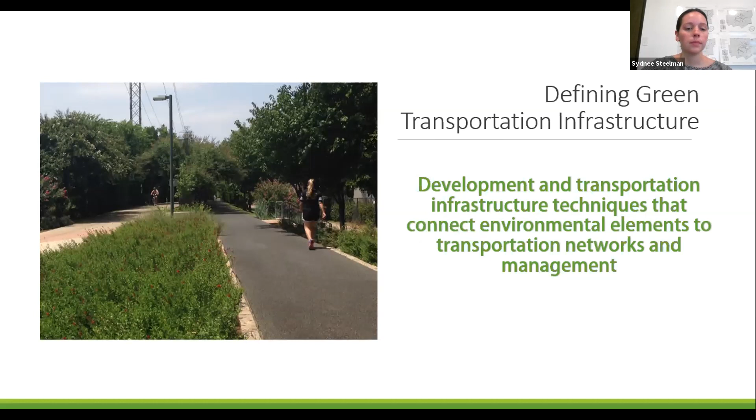The need for green infrastructure: it helps alleviate development impacts, which can also often lead to a depletion of natural resources. Some benefits include the reduction of project costs and waste, while also improving air quality, pedestrian safety, public health, and many more. Next slide, please.

So feeding into all of that, we have our NCTCOG Green Infrastructure Resource Guide, which provides a detailed overview for assessing the various choices you as engineers, planners, consultants may have when integrating green infrastructure into transportation projects. This guidebook covers the various types of green infrastructure, as you saw on the previous slide, as well as a few other aspects to green infrastructure. Next slide, please.

It features some example case studies, which I will highlight three interesting ones here. First, we have the Red Oak Creek Trail in Cedar Hill, which included the use of native plants and over a quarter mile of granite trails with decomposed granite accents in amenity areas.

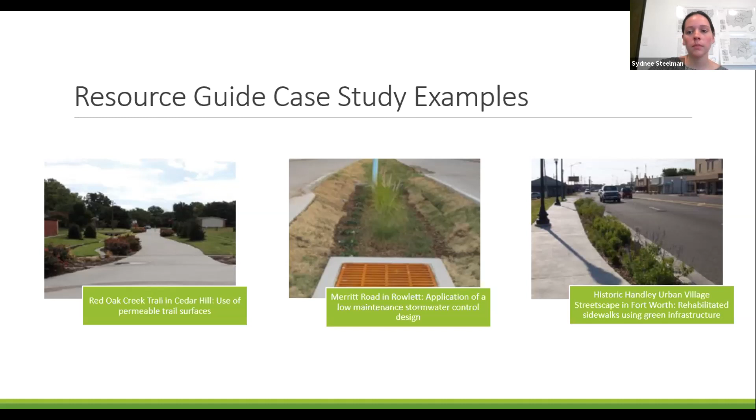Another important aspect discussed in the guidebook is the various financial aspects of green infrastructure, such as overall cost and benefit analysis, as well as the possible benefits of implementing green infrastructure. This section provides an overview of how green infrastructure can potentially reduce the cost of land acquisition, operations and maintenance, infrastructure replacement, and various other project aspects. It also features cost-benefit analysis tables for each type of green infrastructure you can implement, and breaks down various project aspects under those types.

Again, I would encourage you all to please check out this green resource guidebook. I can put a link in the chat box for your convenience, but it's also available on our website. That's all I have for you today, and I'm looking forward to the interesting presentations we have lined up for you all. Thank you.

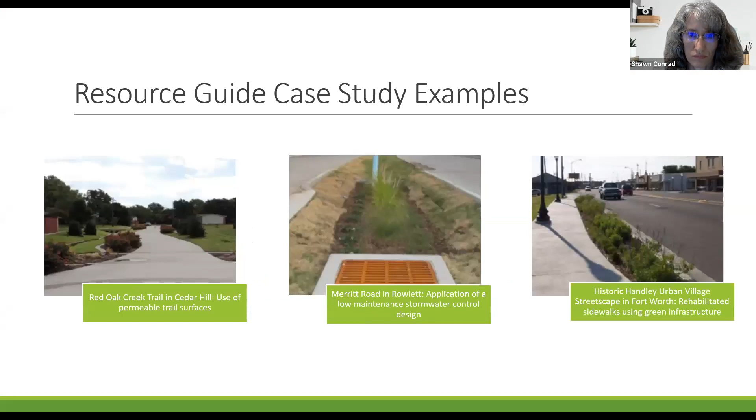All right, we are going to continue on to our overview of green infrastructure resources. We're going to start out with a presentation by Kate Filke, who is a principal transportation planner for the North Central Texas Council of Governments. She leads the environmental stewardship program for the transportation department at NCTCOG, where she oversees initiatives to mitigate development impact. So Kate, go ahead and take it away.

Thank you, Shawn, for the introduction, and thank you for the opportunity to present about a tool that NCTCOG's Transportation Department and Environment and Development Department collaborated on to provide to everybody. So if we could go to the next slide, please.

A few years ago, a member of the Transportation Department's policy board posed the following question. He said, we look at environmental programs as the right thing to do, but we look at them as a cost. How do we measure the return on investment of this work? So with only those two sentences as guidance, our staff launched efforts to create what became the Economic and Environmental Benefits of Stewardship tool. That's an awfully long name, so we just refer to our tool affectionately as EEBS.

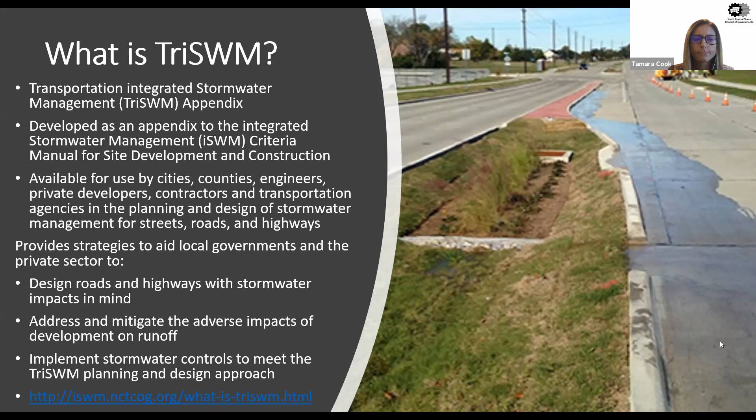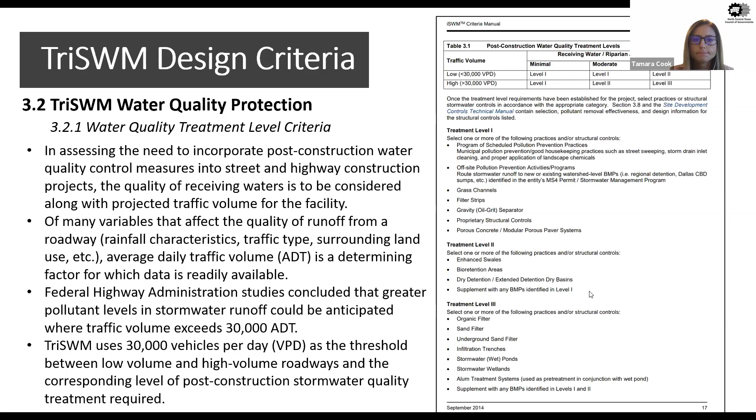And the different mandatory outcomes that are spelled out here. So if they've adopted iSWM, they're going through and identifying which ones they are meeting and to what extent, and also the references within their development regulations or other design guidelines that they have, and where to find those references within their community documents and ordinances or whatever else is appropriate.

These are tallied and sent to a review committee - a committee of peers that have adopted iSWM - and they determine whether or not the community meets that gold, silver, or bronze tiered measurement, which is what we call the certification. But I did just want to point out, TriSWM is an optional outcome in this. It's not required, as I stated - it's optional when a community adopts iSWM, but you do get extra points essentially for adopting those.

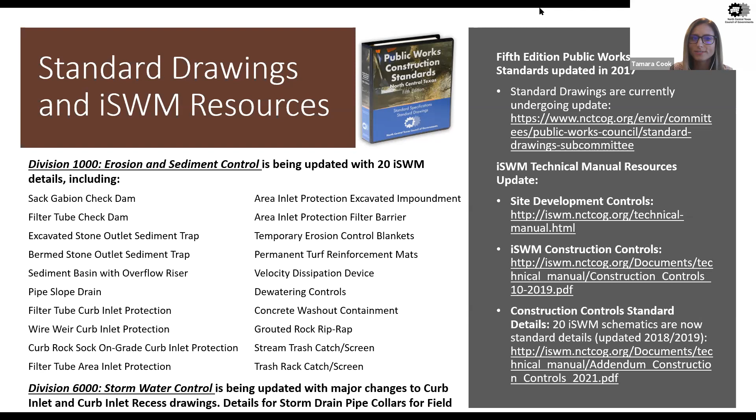Okay, so I think that wraps up kind of the iSWM and standard drawing section. I wanted to just quickly throw in there, and I will shift gears. Next slide.

So this is moving up very high level in terms of regional initiatives on sustainability in general happening in our region. COG has been working with several communities in our region for several years as a group called the North Central Texas Stewardship Forum. More recently, over the last 18 months or so, that group has expanded their focus and changed their mission a little bit and their name. This group is now known as the North Texas Regional Integration of Sustainability Efforts, or RISE for short. The RISE Coalition is what we call it internally.

This group of local governments is working to engage interested local governments in peer exchange opportunities, with the key purpose to share information in the region on things happening related to sustainability. We have many committees at COG focused on all sorts of topics related to sustainability, but a lot of times those are siloed. This group is made up primarily of sustainability directors and some environmental managers, so they have a larger viewpoint of sustainability overall in local government operations, facilities, and the community at large.

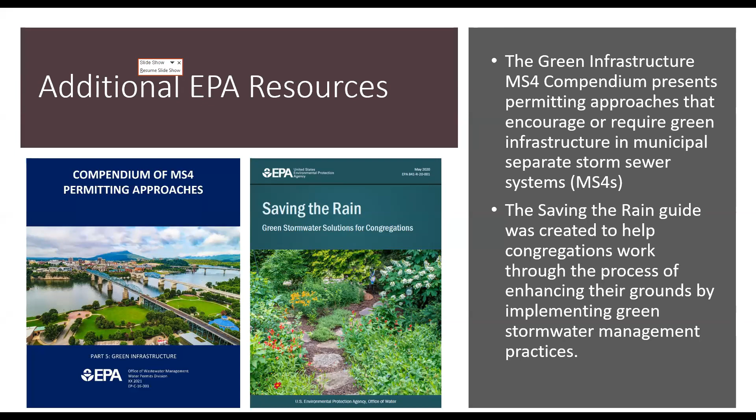Some things on the way: Santa Fe had a pilot in their railroad area, incorporating green infrastructure into roadway projects, and there's going to be a guide letting folks know about their experiences. The New Jersey Green Streets document will cover three case studies identifying the goals, design, installation, and funding challenges for each. That's supposed to be coming out, or actually came out in August 2020, a year ago.

We've also got the April 2021 CLASIC tool for green infrastructure, a life cycle analysis tool for stormwater infrastructure costs. It uses the total life cycle cost framework to support feasibility and planning for stormwater infrastructure programs, and is geared towards different types of stormwater management practices. That list is what's included in the CLASIC tool.

That'd be interesting to compare some of that with the EBS program too. I wonder how they compare.

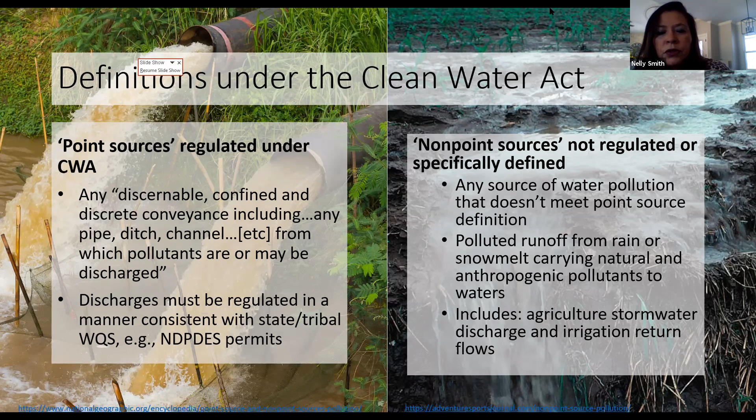Discharges must be regulated in a manner consistent with state and tribal water quality standards or under the NPDES permit. Non-point sources are not regulated or specifically defined as any source of water pollution that doesn't meet the point source definition. Non-point sources are also defined as polluted runoff from rain or snowmelt carrying natural or anthropogenic pollutants to waters, which includes agricultural stormwater discharges and irrigation return flows.

So the importance of NPS work in urban waters - we definitely want to fund 319 projects within urban areas. Basically within EPA, the fund allocations we receive are based on the president's budget and any congressional appropriation language included within that presidential budget. EPA awards funds to authorized agencies to manage the Clean Water 319 grants, and state agencies or authorized tribes award some of those funds to sub-grantees.

This happens through a process that we call request for proposals. For instance, the Texas Commission on Environmental Quality in Texas has a process where they put out requests for proposals and sub-award those grants to specific projects.

So funding under the Clean Water Act also includes the State Revolving Fund. Here in our region, we have Denise Hamilton, who is in the Community Infrastructure section, and she manages all the State Revolving Fund. Her phone number is 214-665-2775. Basically those are not grants, they are loans - you have to pay those loans back, and in some cases they do have very low interest.

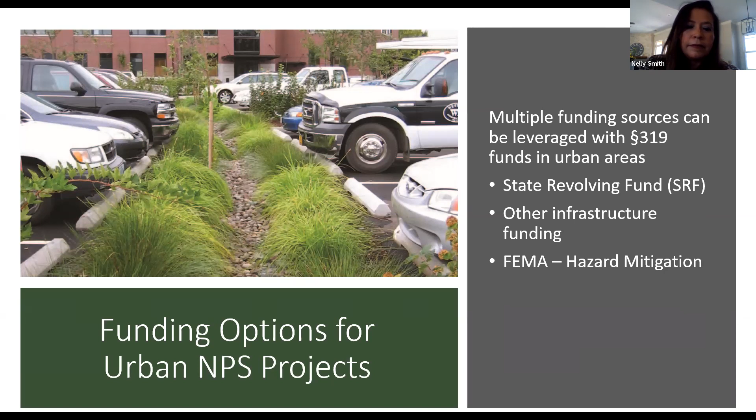Since 2009, EPA under the Clean Water State Revolving Fund has provided more than $2 billion for GI projects, and I believe this is probably going to increase in the future. Again, if you have any questions about the Clean Water State Revolving Fund, I'm planning to include Denise Hamilton's information - phone number and email - regarding how to apply for those Clean Water SRF funds.

Here are general eligible activities that we can cover under the Clean Water Act 319: any GI or stormwater infrastructure activities, watershed planning, technical assistance, monitoring, BMPs, outreach and education projects, technology transfer and training, and any other activity not covered or specified in the NPDES or stormwater permit.

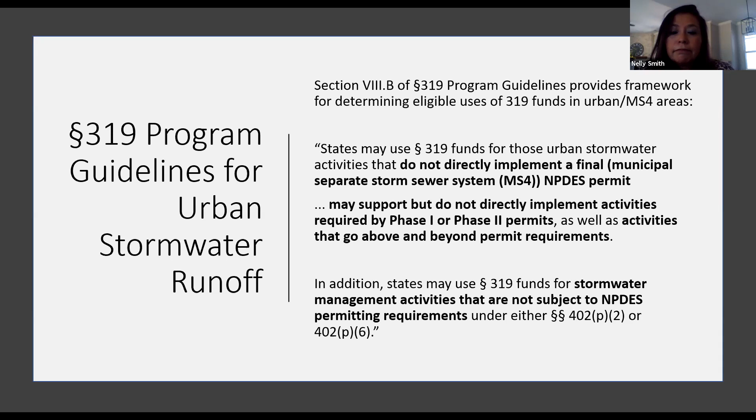Here is basically some regulation under the NPDES program. When we receive requests or when the state wants to fund 319 or any GI projects under 319 funds, there are specific questions that we ask, or the state asks themselves. One of the questions is: is the proposed project or practice required by the NPDES permit?

Is the project distinguishable from actions being taken to comply with the NPDES permit? Other questions are: is the proposed practice similar to actions required by the NPDES permit? Will the 319-funded practice go above or beyond the permit requirements? So when we determine eligibility to fund projects under 319, we look very closely at the language in the NPDES permit or MS4 stormwater planning documents.

Here in Region 6, we have a very successful story under the 319 program: Little Rock, Arkansas, and GI low impact development. The city of Little Rock built and implemented GI at Main Street. The benefits of the rain gardens and other water infiltration systems using GI applications have been very successful for the region. The goal of the project was to reduce the volume and velocity, and improve water quality from runoff.

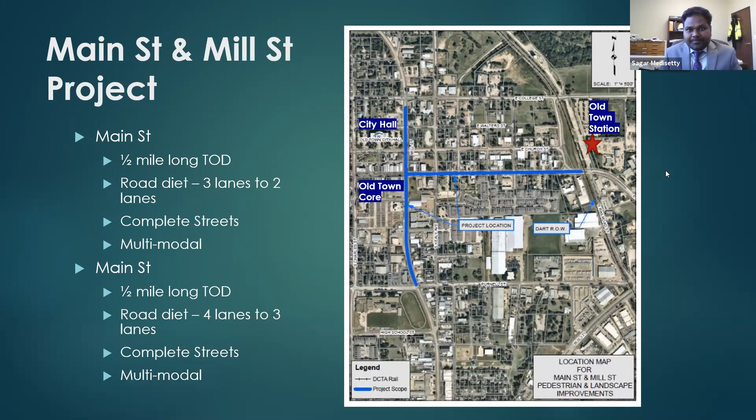The schematic drawings for Main Street and Mill Street show what was planned for this project: a reduced number of travel lanes with a road diet that allowed the opportunity to provide on-street parking on both sides of the street, bike lanes, wider sidewalks for pedestrians, and landscaping. A total of 208 large trees were added in the 1 mile project area.

In the streetscape project, landscaping serves many functions. Large trees provide shade, comfort, and improved aesthetics for pedestrians on the sidewalk. They also act as a safety buffer between the sidewalk and the travel lanes, thereby improving pedestrian safety. They also provide an opportunity to include rain gardens for stormwater management, which is the topic for today.

This is a before and after aerial picture of Mill Street. You would notice in the before picture that Mill Street was devoid of any vegetation; it was all concrete within the right-of-way. The project incorporated landscaping that would provide shade for pedestrians and also provide an opportunity to reduce the stormwater runoff.

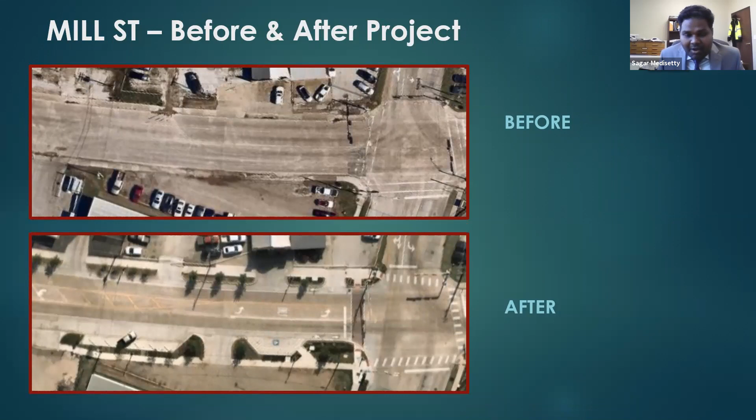Why did Lewisville incorporate rain gardens in the Main and Mill project? Lewisville has a 2025 vision plan. 2025 is the centenary year of Lewisville's incorporation. This project was planned to meet two of the nine big goals of the 2025 vision plan, which are sustainability and revitalization of the Old Town. So early on during the planning stages, a decision was made by the city to add rain gardens in the landscaping areas of the project.

What are rain gardens? Rain gardens are shallow, landscaped, and vegetated depressions designed to capture stormwater runoff, treat it to remove harmful pollutants, and provide for infiltration into the soil to recharge the underground water table. In this image, number 1 shows the runoff from the impervious surface flowing into the rain garden. Number 3 shows the rock berms at the perimeter that dissipate the velocity of the rainwater. Number 4 shows the well-draining soil mix, which provides for filtration, and then the vegetation and plants. Number 2 shows where some of the rainwater is absorbed.

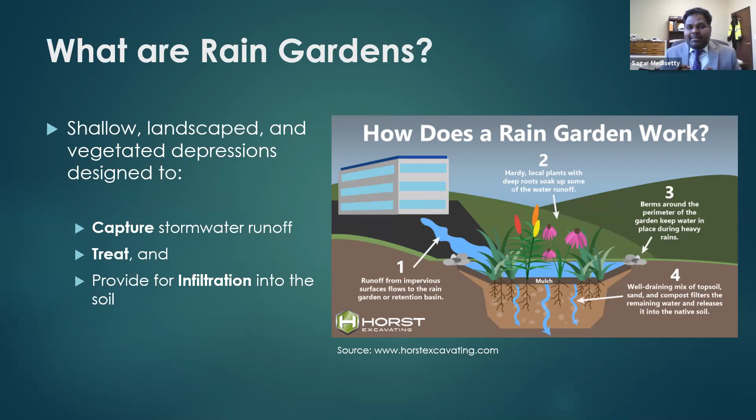Why do we need to treat stormwater? Why not let it go straight to the storm drain inlet? According to the EPA, stormwater is the leading cause of water pollution. Stormwater that falls on our streets, parking lots, and yards gets carried directly to storm drain inlets. Rainwater picks up oils and chemicals that drip from parked vehicles, along with pesticides, herbicides, and fertilizers used on our yards, and conveys them directly to the storm drain inlets. Stormwater does not go to a water treatment plant; it gets conveyed to our creeks, streams, rivers, and lakes, polluting those water bodies. This polluted water harms aquatic life, fish, wildlife, and natural habitat, and even puts humans at risk. When rainfall occurs, the first flush event contains the most polluted water. Rain gardens, when incorporated into transportation infrastructure, are a solution to treat this first flush event.

So what a rain garden does is intercept the water from the road infrastructure before it gets to the storm drain inlet, cleanses and filters that water, and recharges the underground water table.

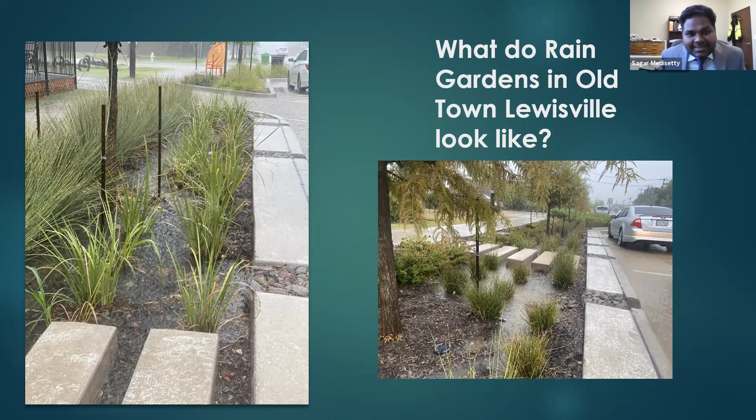These are a couple of other rain gardens on Mill Street. In the picture to the left, we can see a shallow rain garden about 5 feet wide. And on the picture to the right, there's a relatively deeper and wider rain garden situated between the on-street parking and the sidewalk.

Two types of rain gardens were used with the Main and Mill project. Rain garden type 1 on the picture to the left shows a shallower rain garden with 6-inch depth at the center from the street grade. Rain garden type 2 in the picture to the right shows a deeper rain garden with 12-inch depth at the center from the street grade.

The elements of a rain garden are curb cuts, rocks placed behind the curb cut, vegetated swale, slight longitudinal slope, well-drained soil, and an exit for excess water. These rain garden elements are discussed further in the next few slides.

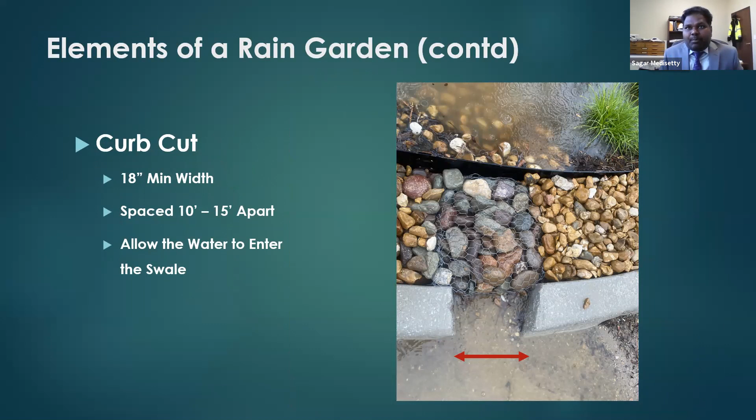Curb cuts need to be a minimum width of 18 inches to provide an access point for the stormwater from the street to enter the swale. The curb cuts are spaced roughly 10 to 15 feet apart.

Rocks next to the curb cut. If stormwater enters the swale at a fast pace from the street, it has the potential to cause erosion of the soils, mulch, and may even uproot smaller plants. For this reason, rocks are placed next to the curb cuts to dissipate the velocity of the entering water. For this project, 2-inch to 4-inch size river rocks were used, and the rocks were placed at a depth of 3 feet from the curb cuts.

Vegetation. Hardy, drought-tolerant Texas native plants were planted in the swale. These plants soak up some of the entering stormwater.

Another element of a rain garden is a slight longitudinal slope. Rain gardens need to be designed with a slight longitudinal slope so that the stormwater continues to flow and covers the area of the entire rain garden, providing water for all the plants and also facilitating infiltration along the entire landscape bed.

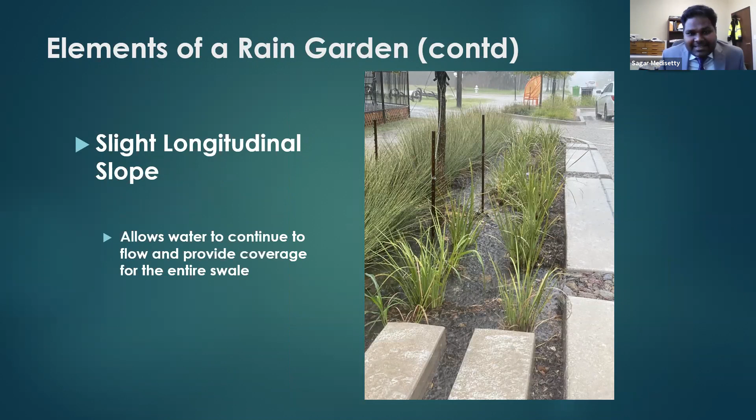Well-drained soils. It's very important to have the engineered mix of soil. The soil mix for the rain garden needs to be a mix of topsoil, sand, and compost, which will allow infiltration into the ground. For this project, we used an engineered soil mix of 70% medium to sharp sand, 20% compost, and 10% sandy loam topsoil.

Infiltration rate for the project specified that 6 inches of standing water should drain and percolate within 48 hours. During infiltration, the soil breaks down the hydrocarbons and harmful pollutants, thereby treating and filtering the water in the swale, which recharges the underground water table.

One important thing when designing the soils is to note that it is very critical to ensure a 5-foot minimum separation between the bottom of the rain garden to the top of the underground water table. This is to prevent pollution of the underground water table.

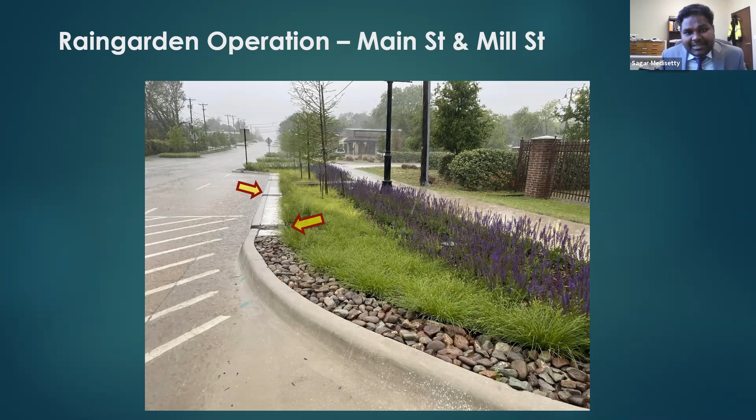In the photo to the left, you can see water entering the bioswale through the curb cut. Notice that the rocks immediately next to the curb cut are wrapped in wire mesh, so rocks don't slip out into the street, creating a potential hazard for bicyclists in the bike lane. You'll also notice the rocks at the curb sit slightly above the street surface.

We noticed a problem: since the curb cuts are designed as an outlet as well, during heavy rains mulch was getting washed out into the street. So we placed the rocks a little bit higher, which still allowed water to enter but stopped the solid debris from entering. The Parks Department would need to keep the curb cuts clear of debris with their maintenance program.

The slight longitudinal slope keeps water moving along the entire length of the rain garden, providing water for all the plants and allowing infiltration along the entire length of the swale, and then excess water drains out from the downstream curb cut.

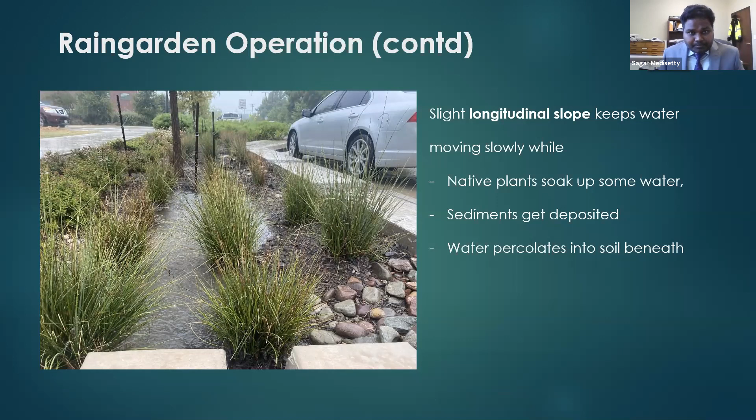These photos show the rain garden at the roundabout closer to the rec center building. A sawtooth curb allows rainwater to enter from the pavement into the landscape bed. The rocks filter the water, and the landscaping and trees absorb some of it. In the photo to the right, you can see a storm drain inlet placed at the low point of the swale to absorb any excess water.

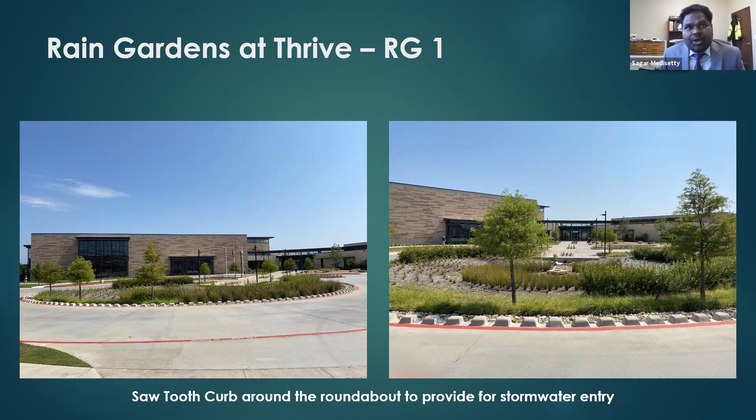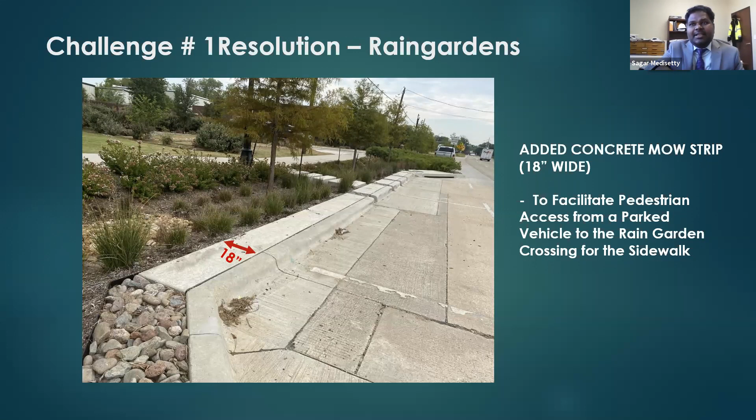So an 18-inch wide concrete mow strip was incorporated during construction by change order. Now people alighting from a parked vehicle next to a rain garden can walk along the concrete strip to access the nearest pedestrian crossing to get to the sidewalk.

We underestimated the amount of water that would be coming from the private property. During rains, it was actually a very large volume entering the rain garden, causing erosion of the mulch and soils and uprooting the plants.

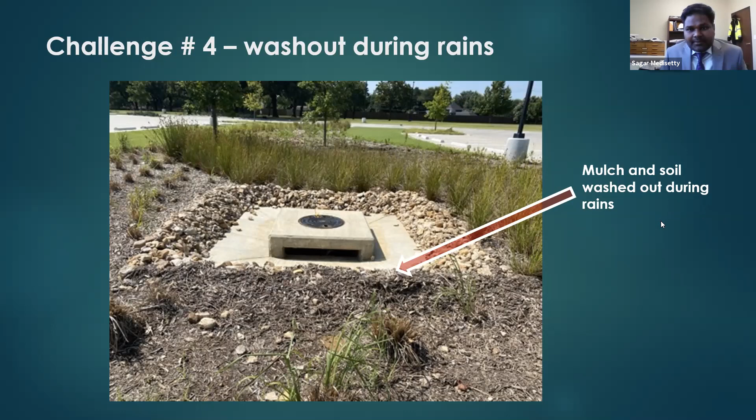Next slide, please. To mitigate this erosion problem, rock berms were added along the water's path around the inlet, and you can see further along that rock berms were added at frequent intervals to reduce the erosion. Next slide, please.

This is another photo of the rain garden showing the added rock berms. Next slide, please.

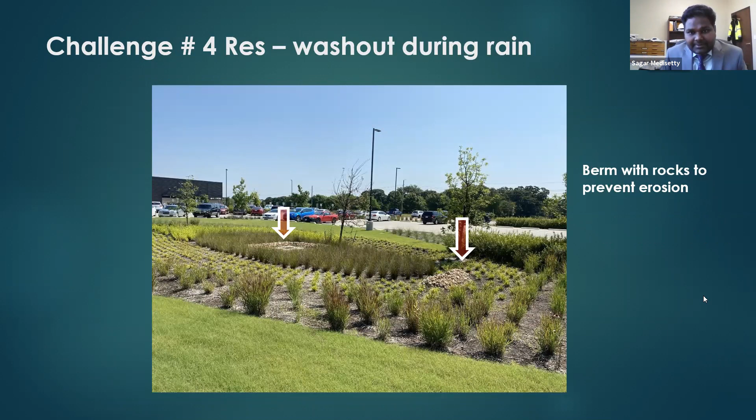This is the end of the presentation. Thank you for your time. I'll be happy to answer any questions you may have at the end of the presentations.

All right, thank you very much, Sagar. That was very interesting. I appreciate you presenting that information. Thank you.

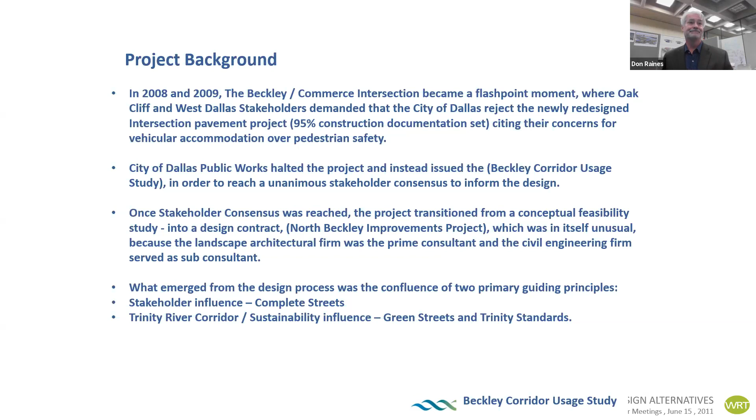So again, the context - we showed the Trinity plan with the lakes back at that time, showing that the corridor usage study was to engage the stakeholders and really understand the vision. The city asked that we really focus on what exactly they want. What we had to do was find a way to make a commercial industrial area into a more walkable mixed use land use pattern, which is what PD 714 is written about, the area plan for this area.

Also, I mentioned the Trinity project. At the time when I was working on that project, we realized that if we were successful and had the attractions we envisioned, we could attract over 100,000 people on a beautiful Saturday. Sorry, let me get a little water real quick.

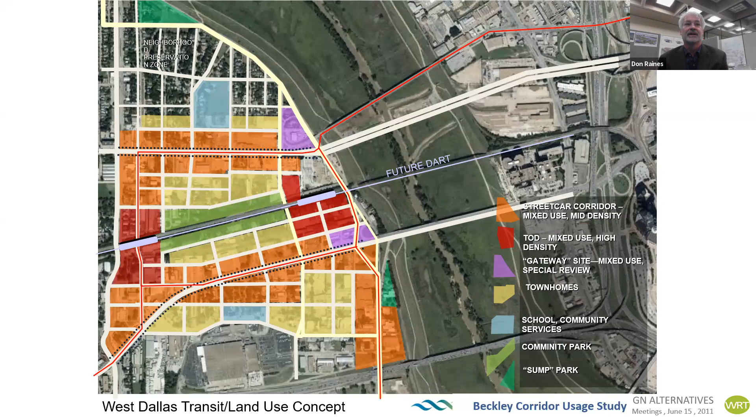I'll just go over this quickly - we were looking at what the possibilities were in West Dallas as far as what kind of mixed use pattern may arise from the Trinity project. This is prior to the Margaret Hunt Hill Bridge, prior to the Continental Bridge. We were just trying to get a good grasp of what might be the future. Again, this is 2009, 2010.

The stakeholders basically said, we want to make sure handicapped people can get to the overlook, and we want to make sure bicyclists and pedestrians can get to the overlook. Nothing that was designed prior to that was designed in that direction.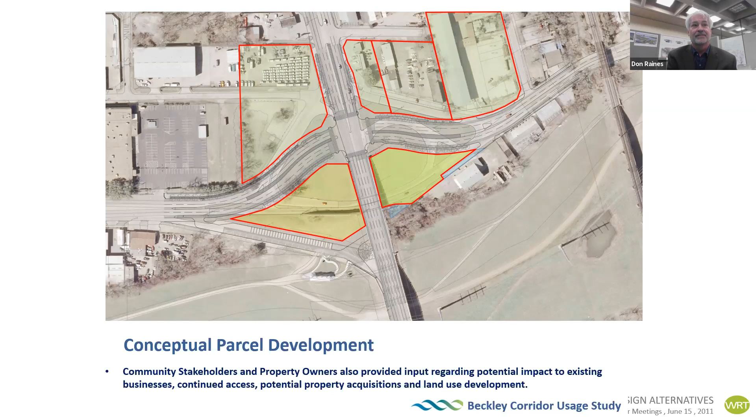From West Dallas and North Oak Cliff's point of view, the community stakeholders were very strong in looking at complete streets. They wanted bike lanes, pedestrian refuge, and for us to respond with complete streets and green street features. They did not like wide turning curves for trucks. They wanted to see if it was possible to have transit stops. Prior to Uber, prior to streetcars, we thought it would be a good opportunity to come up with designs that would encourage multimodal connectivity to the Trinity. Those things were brought up very early, prior to all these things opening.

When it came to the Trinity itself, working on that as a landscape architectural firm, we wanted to make sure sustainability was in the forefront. The intersection of Commerce and Beckley is a bit of a gateway, you might say, to Fort Worth Avenue, so the stakeholders were also advocating best practices in design as far as stormwater integration. We were all new to this, so this was all uncharted territory at the time.

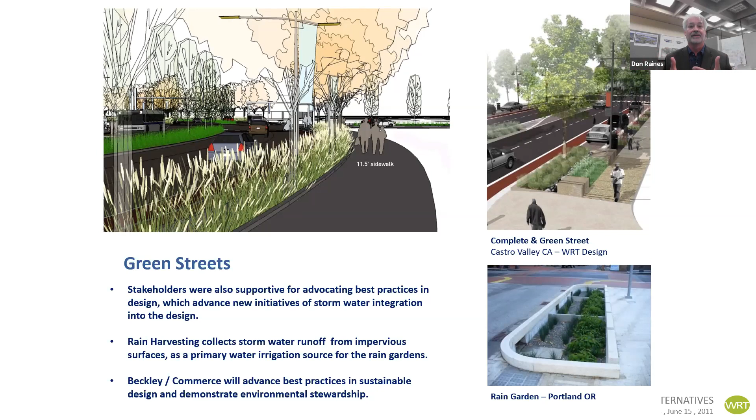I took a photograph in Portland, Oregon. I thought it was interesting to see what rain gardens were about, and what we could do as far as using irrigation and stormwater runoff as hopefully a primary irrigation source for the rain gardens, though we know we need the first few years to supplement that. So our choice was complete streets and a green street, two different approaches, and the convergence between the two.

That was the concept. When we showed this slide, it was just a SketchUp rendering, as you can see. We basically got in front of all the stakeholders and reached a consensus—a unanimous consensus, which wasn't always easy.

There were some stakeholders who were very concerned this would slow things down. Methodist Hospital in particular was concerned that it might impede ambulances. We understand that, so we tried to make sure the functionality worked for everyone involved, but we had to balance transportation and pedestrian usage, and really think about this intersection in a completely different way.

That concluded the corridor usage study. These are just quick diagrams from our public meeting. We wanted to show that first we had fine-tuned the design to where we had this nice four-way intersection.

I'm just going to show a few other things featured here. We added 11.5-foot sidewalks, part of PD 714. We also had 15-foot wide crosswalks, and wanted to make sure there was an 8-foot pedestrian refuge in the median. Adding to that, we wanted enhancement pavers, timed signalization for pedestrians when they cross, and 18-foot curb radius turns, which is tough to come by—and it may have even shifted a little since this design.

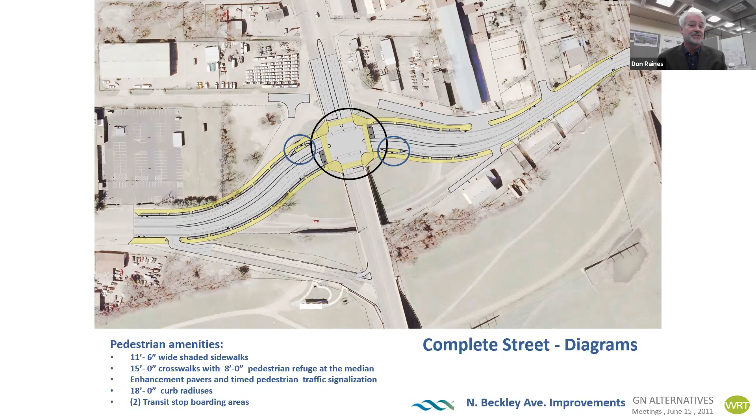Also, what's very unusual is we added these transit stops, something you'd see more in Europe than in Texas. These little transit stops, even without transit, if there are shuttles or big events at the Trinity, this is a place you can pull over, stop, get out, have ADA access back to the sidewalk. The bike lanes go between the transit stop, slipping behind the transit stop itself. We wanted to create that opportunity even prior to asking DART if we could use bus stops, but we do know that bus number 1 came through this area. So it's a transit stop, somewhat ambiguous, but designed for shuttles, even streetcars if possible.

Then we had the cyclist amenities. We included 5-foot bike lanes with a 3-foot buffer. We knew we had issues when crossing the Union Pacific Railroad, where we had to basically have the bike lanes merge into the lane itself, just because we ran out of space. But we wanted to make sure there are marked crossings at the intersection itself.

Other things we tried to do were also incorporate bike boxes. Unfortunately, it didn't happen, but at the same time this was being designed, Commerce was being designed too. So other markings and things came a little later.

For access and parking, some things have changed since this drawing from 10, 12 years ago. We had slip lanes in the area, everything designed for commercial and industrial use. We also have that ramp you see on the lower left that works up to the Beckley ramp. We realized that would be a good opportunity to have parking spaces there, and we counted 26 spaces if you were to do head-in parking, because the lane itself is 40 feet wide. But we did not want to encourage that bypass for people to drive fast, where pedestrians are trying to get back onto Commerce going eastbound. That was what the stakeholders asked us specifically.

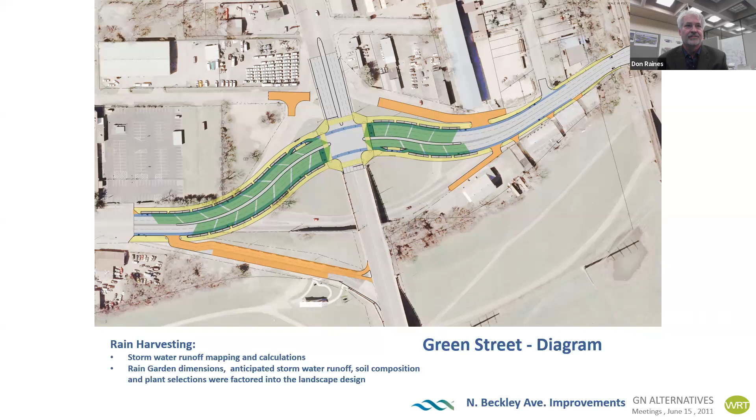These are just early renderings we did. I like to show rough sketches, I hope you don't mind. I know it's hard to read these, but we had to do our calculations and determine the spacing of the street trees. They roughly came out to 22 feet apart, and we realized we needed to create a weir system because we're not on a flat street - we're on a street with a topographic change. So we had to make sure we sort of stair-stepped our rain gardens from one cell to the next.

Basically, they're designed to hold an inch and a half of rain before there's an overflow inlet. We hold water just like they did in the city of Louisville, but we have to be able to let, after an inch and a half of rain, the water overflow and go away.

Now we get down into the details. This image on the upper left is really a project that was in progress in Kentucky. We did this little diagram to show basically the profile of how the rain garden works. No surprise to you, you've seen these before, but this shows how we used a PVC pipe at the bottom of the aggregate level to allow for percolation flow to go out. Working our way up, there's a choker layer, and then, very similar to what the city of Louisville did, we had a good mixture of different soil. These are designed to be troughs, designed to hold water there for a while.

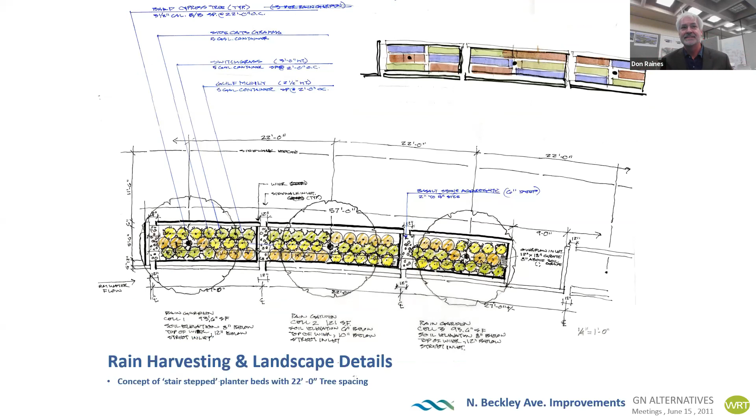We wanted to make sure the functionality worked. We got into early landscape designs showing how the native plants and trees work together. We had to make sure the cells themselves were not too wide, so they didn't hold enough water, or too narrow, so they held too much water. So there's a bit of a scale balancing act. Sorry for my voice.

So again, it does come down to once you get the soil right, which is everything. Once you get the soil right and get the percolation rate to work, and make sure you get the science to work well, you have to make sure you choose the right plants.

I did a lot of research and realized what's so interesting about bald cypress trees, even though we see them a lot here, is they are a floodplain tree. They can handle inundation of water quite a bit. I found that the other plants chosen were not just drought tolerant, but really flood tolerant, so you'll find these type of plants in the Trinity floodplain with the type of soil we have.

It's important that you get the pH right with the soils you choose. Cypress actually prefers a little more acidic soil, so I even got to the point where I didn't want the stones in the rain garden to be too alkaline so that the pH gets unbalanced. We want to make sure we got the right soil composition, and that even the cypress trees find a way to thrive—they're one of the better trees in the United States.

They actually can pull heavy metals out of the ground, so it has a really good biofiltration capability, as well as what we see with blue stem switchgrass, sideoats grama, and Gulf muhly.

We also wanted to make sure that with the Trinity project itself, we helped elevate the signage program for wayfinding. We were using the City of Dallas bike signage system at the time to make sure everything stays cohesive—again, a year or two before the bike plan.

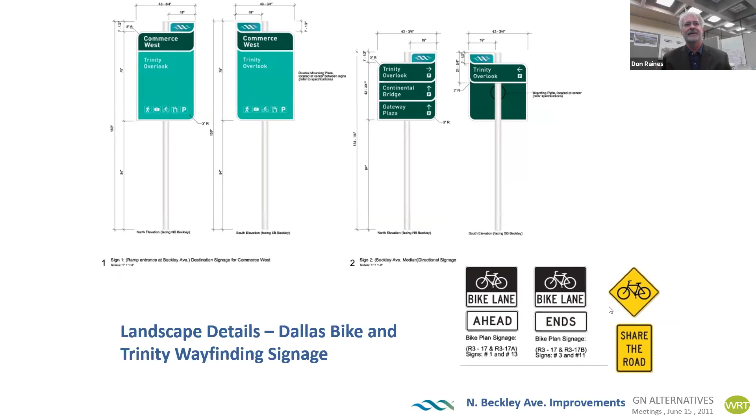You'll also notice we had our lighting system, again helping with the identity of the Trinity project, creating areas for banners as well as LED lighting, keeping with the blue and green theme of the brand identity itself.

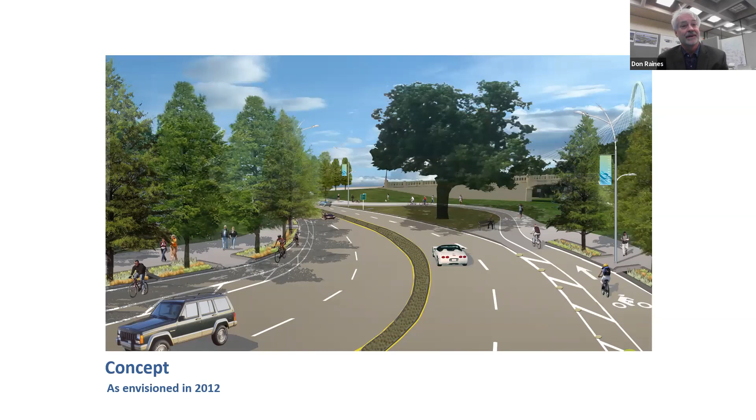So this is a before, from 2009—rather mundane. This was the concept in 2011 and 2012. If you notice, we graciously kept the 130-year-old pecan tree. We found out that tree was planted by a German family that used to run a ferry across the Trinity River to downtown.

This was completed in 2019—it took a few years. The total price was about 4.7 million, I believe.

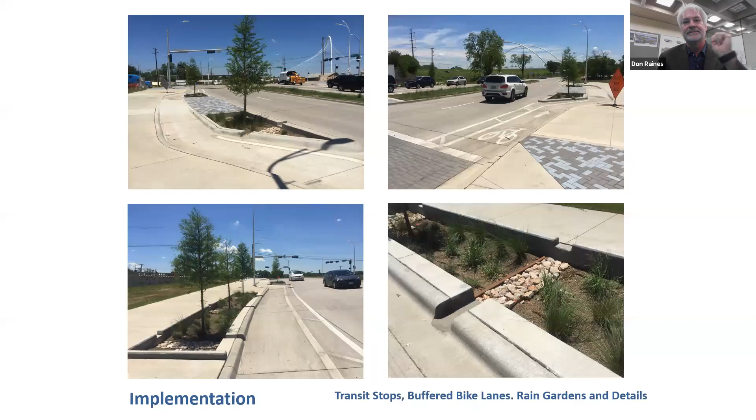So that's implementation itself. I think it's interesting that we learned some lessons—there are some things we may have been able to do a little bit better, but we can discuss that in the Q&A. That concludes my presentation.

Thank you so much, Don. Great project, it's very interesting.

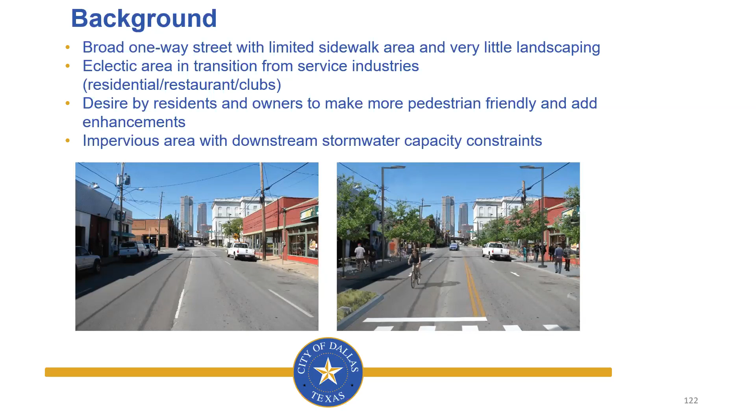The reconstruction concept proposed was to change Elm Street from a one-way to a two-way street. We wanted to increase sidewalk areas in front of businesses for sidewalk dining and more area for pedestrians in general. We wanted to increase parallel parking areas, provide enhanced crosswalks at intersections, and provide stormwater conservation through pervious pavements, amended planters and rain gardens. We wanted to increase landscaping, enhance pedestrian accommodations through sidewalk dining, provide ADA and bicycle access, and improve lighting in the area. The picture to the right shows one of the areas where we managed to achieve that within the project.

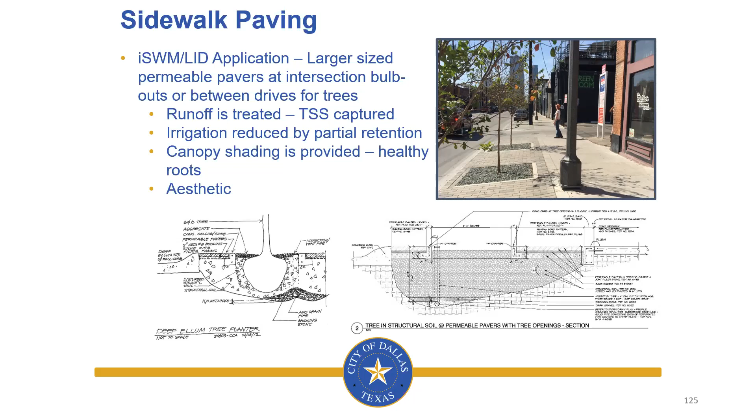We're also creating planting beds and rain gardens in the area. Because this area is so heavily used, we had heavy compacted urban dirt and old road subbase at the new planter areas. Traditionally, we would bring in some topsoil and amend that dirt at the surface for the planting beds. But what we really needed to do was some urban dirt remediation to create soil for plants to grow in.

With the iSWM and LID application on the planting beds, we needed to create planter beds with healthy soil. So we removed the road subbase down to natural subsoils. Those subsoils were ripped very deeply to make sure they were very loose. We amended those soils in stratified layers by introducing topsoil, expanded shale, and mature finished compost. This soil structure was restored for planting, increasing the permeability and infiltration. You can see the various pictures on the bottom showing exactly what was introduced into the soil to create this permeability and infiltration.

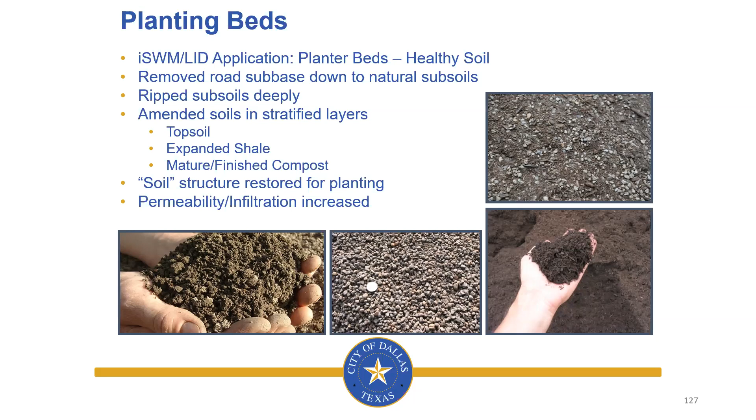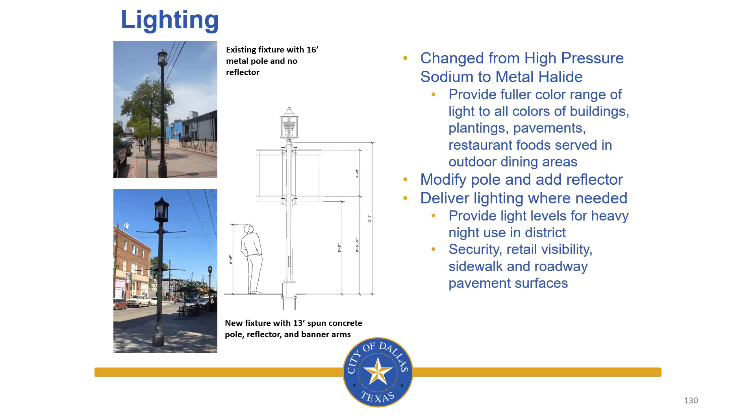It also has banner arms because this is in the Deep Ellum Foundation area, and there are things they like to display on banners that they didn't have the opportunity to do previously. So for a maintenance aspect, maintaining the landscaping after construction and allowing for establishment, we provided a 2-year maintenance contract, which held the plant replacement warranty. The Deep Ellum Foundation took over the maintenance responsibility after that 2-year contract.

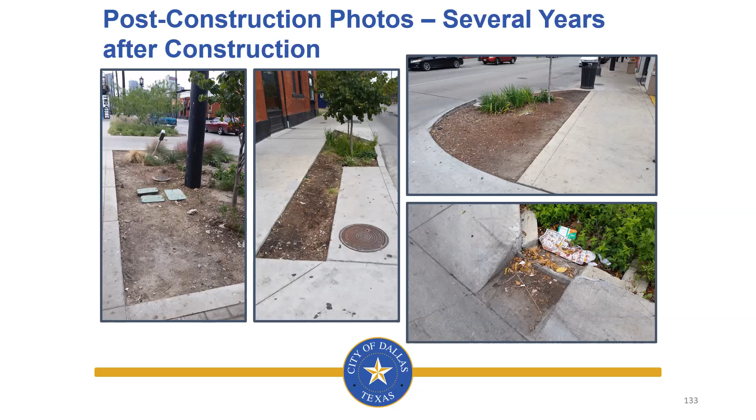Moving on to the next slide, here's what things look like current day. The upper left photo, you can see the trees are doing well in the planters, but if you look closely, there are a lot of cigarette butts embedded within the permeable pavers. In the lower left photo, you can see some subsidence in the permeable pavers, and we also have some utility work going on.

In the upper right photo, you can see more trash in the forebays. And in the lower right photo, you can see that the rain garden itself is doing well, but the tree is having some issues. That particular rain garden is an area that doesn't have a lot of restaurants and bars, so the rain gardens themselves aren't getting trampled, but we're still having a little bit of issues with maintaining the actual plant material itself.

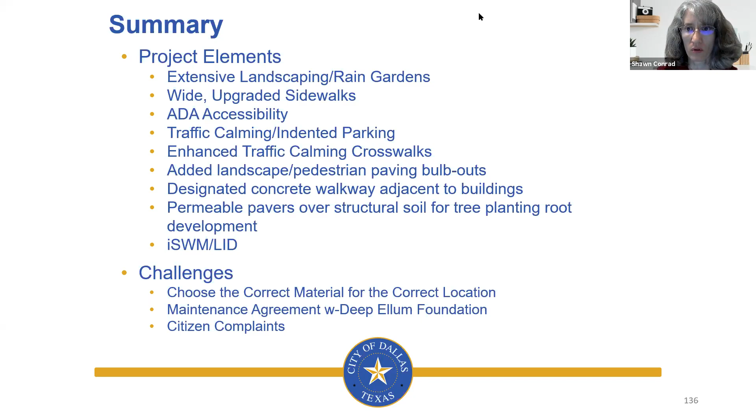This will become a little more apparent when I go to some of the next slides. So yeah, if we can go ahead and move to the next slide. Thank you.

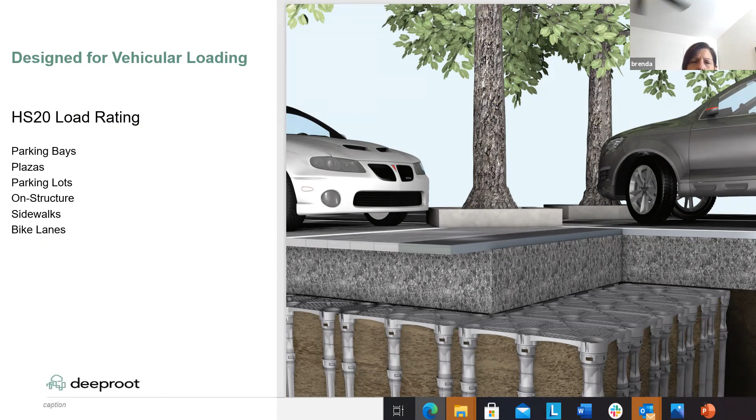Thank you. Thank you, Laura, I couldn't see myself, so thank you. Is that better? Everybody? Somebody? Thank you. Okay, thanks, Laura.

So what you're looking at here is just an animation of what a parking lot might look like. That dark gray strip could be permeable pavers to let some water in. We could have curb cuts in those tree cutouts to let water in that way. We could have some kind of overflow where water comes into the Silva Cell system. I'm going to talk a little later about all the ways you can actually get water in.

So you can do all the things you would do in open bioretention, except now it's under the pavement. You're not losing all those parking spots. You don't have to have those big 10-foot by 20-foot islands that trees never really grow in anyway. Our goal is to shrink down the size of parking lots so we can still have trees, but we don't need to give them so much open space. That alone is a huge cost savings and a land savings that before now was just impossible.

We had years of arborists telling us we need more soil for our trees, we need bigger tree pits, we need bigger tree islands. Well, that's great, except that takes up your land. And as your land gets more expensive, these kinds of systems make a lot more sense.

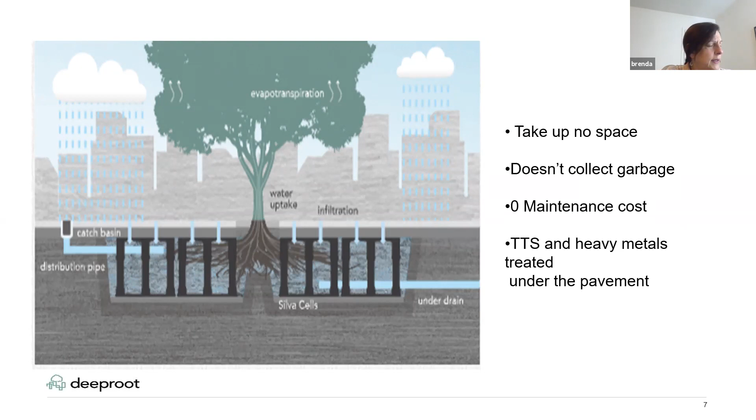So that is sort of the big idea. I think our next slide goes directly into Sundance Square - oh nope, I have one more.

So this is just another cutaway animation showing those blue arrows bringing water into a permeable pavement strip, bringing water down into the Silva Cells, and then that big continuous trench of soil is there available for the trees. So again, we're not losing any parking spots, we're passively irrigating the trees, and we're treating the stormwater and keeping it on site.

So again, let's do as many of those services as we can in the same area rather than having different systems spread out all over the parking lot. I know I've been to Texas a few times, obviously it's so hot there - I live in Atlanta, but Texas is hotter. We're all looking for the shady spot to park. So let's try to have shade for every car, and keep our parking lots, sidewalks, and plazas cool.

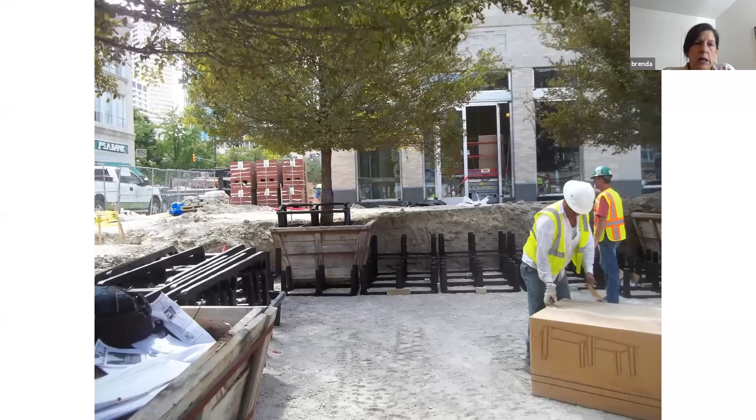So Sundance Square, I imagine maybe more of you have been to Sundance Square. The total project of the Sundance area has been going on for about 30 years, from planning to inception. But the Sundance Square itself, this huge plaza, was basically built over 2 existing surface parking lots. They took those 2 parking lots and transformed them, and built around that square, put historic facades on them so it actually looks kind of like the Wild West. And of course restaurants and shops moved into all those.

The idea of this design was to create a double allee, 2 different Bosque areas. Basically the designer, Michael Vergason's office, their goal was to grow large trees that were connected to create a ceiling effect in these 2 bosques. I love some of these installation photos because you can see the trees were not small when they started. They wanted some immediate impact, but the Silva cells were just built right up to the trees. The reason for this is that there isn't going to be paving per se, the paving is going to be decomposed granite, which is automatically a pervious surface to let water in.

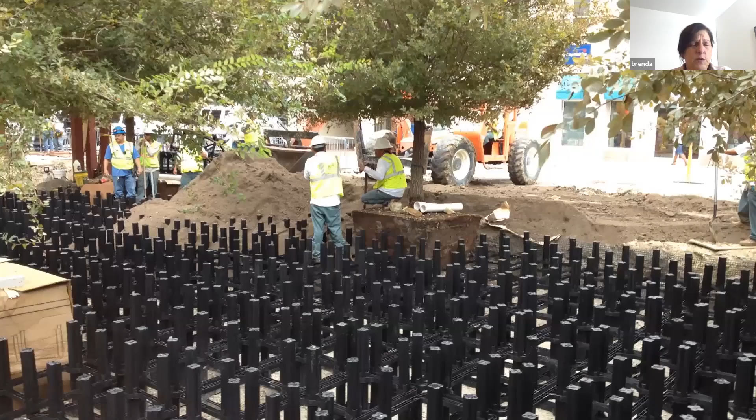So basically what you're seeing in the foreground is the Silva Cells before there's soil.

We're going to fill that entire thing with uncompacted soil. The only thing they're going to do is walk through it, so they'll get foot compaction, and then they'll put a deck over the top that protects that soil from future compaction. This project is such a high traffic plaza.

Part of the reason for using the Silva Cells was to eliminate compaction. There are plenty of plazas with DG where they don't use Silva Cells, but when thousands of people walk over it, that soil becomes compacted, and that's what they're trying to avoid here.

Trying to remember what year this was—2013, I think.

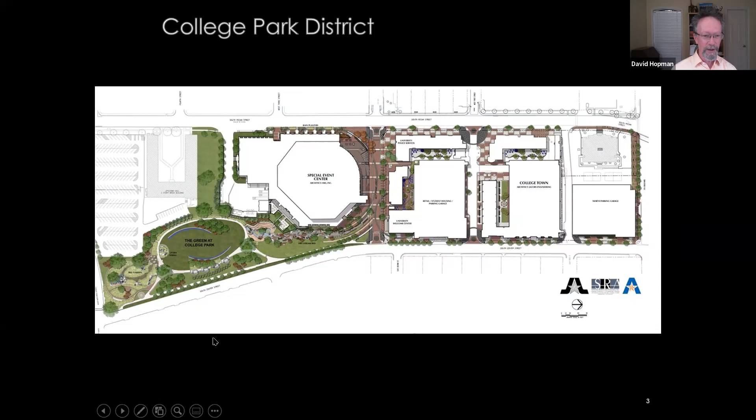Now there have been a number of projects that have been built. Paris Rutherford and others are starting to finally get on the bandwagon. But we're going to be focusing on this area over here, the Green at College Park. Let me start my timer, otherwise, I'm a professor, I can talk for days.

Here you can see a computer model that was done by Schrickel Rollins, which is now Parkhill. I do need to acknowledge them as the designers of both the landscape and the civil engineering, they did a great job working together on that. Of course UTA is the owner, and this project would not have been possible without a significant grant from the NCTCOG. So credit where credit's due.

This was designed as a stormwater green piece of green infrastructure. You can see here the plan gives you the best spatial arrangement. The water is basically flowing from right to left, and we'll talk about that in a minute.

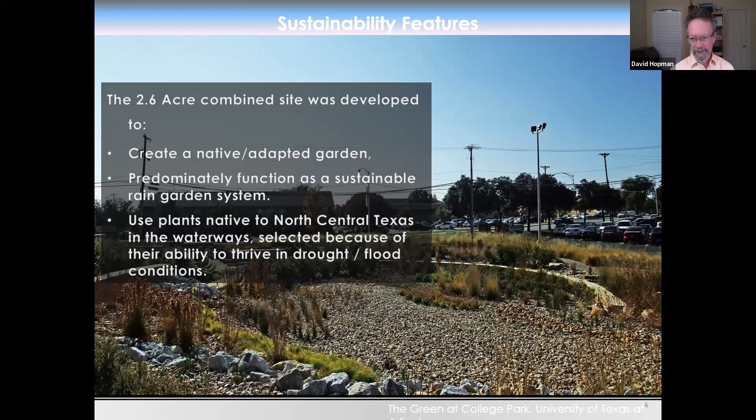This is the part of the list that we use to get sustainable site certification: reducing potable water use by more than 50%, lots and lots of stormwater features, native and adaptive plants, reducing urban heat island, et cetera, et cetera. So it really is the greenest thing that we have on our campus.

It was one of the first 3 projects worldwide to get sustainable site certification, and that was a really big deal. It was really hard because the system was being developed — kind of like being the first LEED building. Sustainable Sites is like LEED if you don't know about it, and it's structured the same way, and it's owned by the same company, GBCI. As we were getting certified, we were working through the systems — how do you get a project certified, and what are the criteria?

I was also involved in writing the first test to become a SITES AP, similar to a LEED AP. You can see the prerequisites and credits are set up in a similar way to LEED.

This project got a lot of points in water, soils, and vegetation, but it also got points in materials, human health, construction, operations. It got points in everything, but soils, vegetation, and water were probably the biggest.

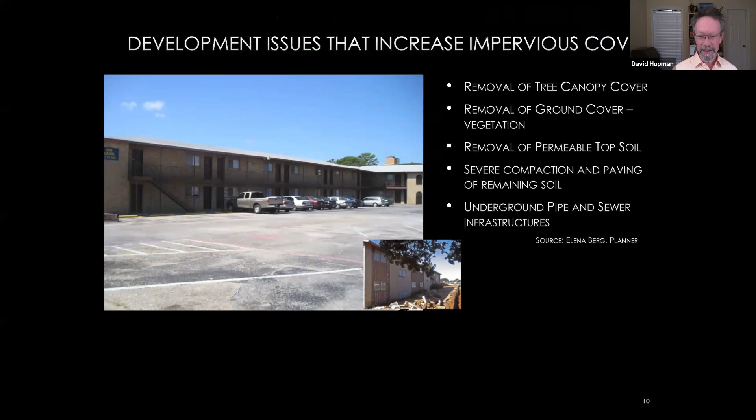You can see at the top it was basically old, beat-up apartments and parking lots. Now at the bottom here, there's still one big parking lot on the upper left-hand corner—I guess you can see my cursor.

This project, even though it looks like it has a relatively small footprint, actually processes a third of all the water on the UTA campus, a 460-acre campus. In that sense it's transportation green infrastructure, because water from a third of the campus's parking lots and streets all comes into there on a 100-year storm event and gets processed. It's really a very robust 3-acre piece of green infrastructure.

I'm a big believer in plants, not just for environmental issues, but also for ecology and human amenity. We know plants lower people's blood pressure, and we certainly need that nowadays—my blood pressure's up with all the problems we have. So we need trees, but we also need understory. The understory is how people experience a lot of greenery.

The Sustainable Sites Initiative has this thing called the Biomass Density Index, which not everybody's aware of. If you want to find out more, just Google Sustainable Sites Initiative—they have tons of information, ways to calculate it, studies, and the rationale for everything. It's a great primer on all the things you can do to make a landscape what I call future viable.

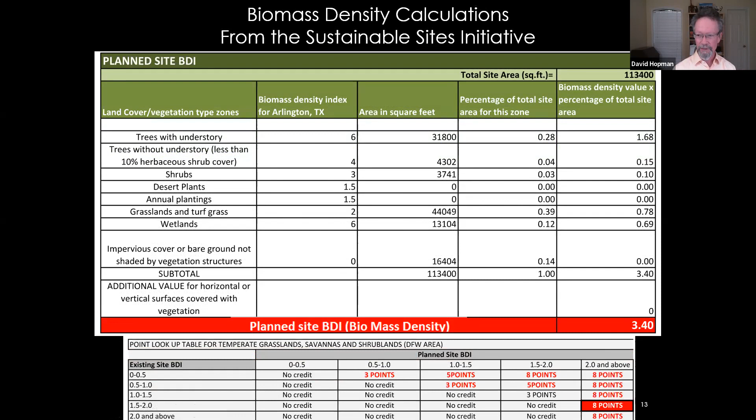The biomass density index went up to 3.4, so we got 8 points. The Sustainable Sites Initiative is difficult to get certified, but it really pushes everybody to do the right thing, so I think it's really valuable in that sense.

We also looked at the solar reflectance index here. You can see concrete pavers with SRI over 29—we tried to keep all materials above 29, further mitigating the urban heat island. Only 15% of the site is now covered with hardscape, so we really tried to mitigate that.

Here's the footprint of the existing site, where we started. You can see the weighted curve number came down from 95 to 83, which is really good, and the impervious cover came down from 95 to 15. That really made a huge difference.

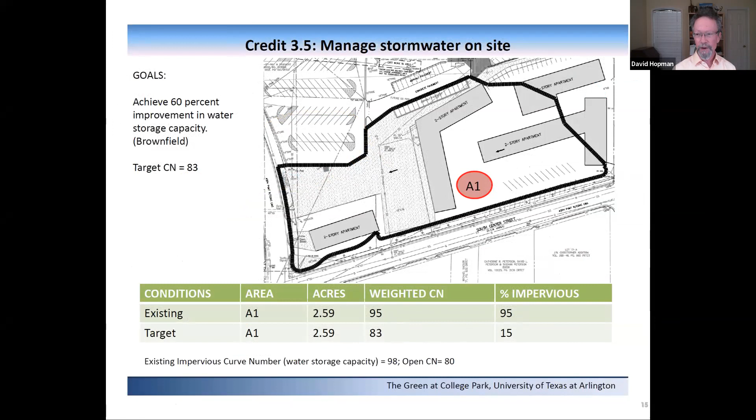Here you can see that treatment train again. The water goes through a whole series of little rain gardens and check dams, then a long bioswale, which dumps into what they call a rill garden—basically a large rain garden full of plants. Then there's a riprap dam right here which holds the water back. This part here, called the Oval Garden, is actually a concave area that will hold massive amounts of water in the event of a 100-year flood.

The water actually comes up from what they call the storm spring, which is a large drain. There are two 4-foot by 4-foot box culverts that come under the park and meet, and then there's one RCP concrete pipe that comes out of there. I can't remember exactly how big it is—either 12 or 18 inches. So it's a large pipe, but not a massive one.

In the event of a massive flood, that pipe meters the water going into Trading House Creek. This is the UTA campus, and this is Trading House Creek right here. That flows into Johnson Creek, which is a federally impaired waterway, and then of course Johnson Creek flows into the Trinity River, which has its own issues.

So this is kind of interesting. I'm going to spend a little bit of time on this.

So you can see here, here's the first part of the treatment train, collecting all the water from the roof of the College Park Center. And by the way, we do use the AC condensate also. All these places that just look like flat places, they're all actually little depressions, all little rain gardens. That's a rain garden right there, rain garden right there. This right here where this tree is shown planted, that's a rain garden. This is that big oval depressed area, depressed down about 3 or 4 feet, holds a lot of water.

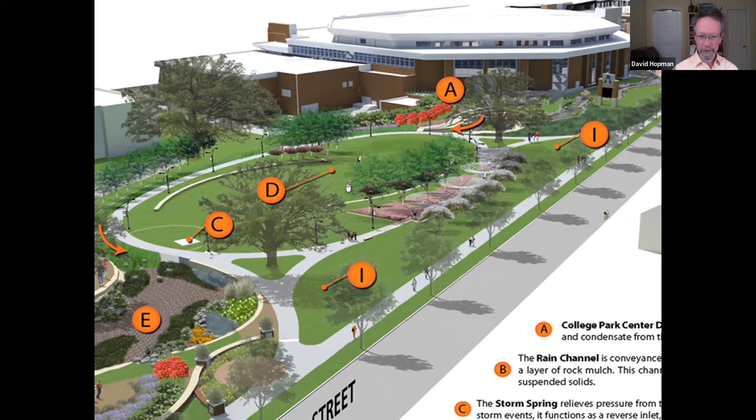There's the storm spring, and the water comes all the way around here. It's got cattails in a big bioswale, and it comes down into the rain garden, which has gravel on the bottom. It's almost all vegetated now. Riprap check dam, and then the water - you're going to see a video in a second - just kind of trickles out here, even after a really heavy rain event. It's just a trickle of water.

But there are flooding controls here. This will actually go into the storm drain if it's overwhelmed, which I've never seen it overwhelmed, but presumably it could be if we had 18 inches of rain one day or something, which happens occasionally, not very often, thank goodness.

So here's where we started. The water was concentrated, right? That's the way they did it 30, 40 years ago. So it was eroding, it was hot, it was dirty, it was running into a channel that had no particular functionality, into an RCP, and then blasting into Trading House Creek, hot and dirty.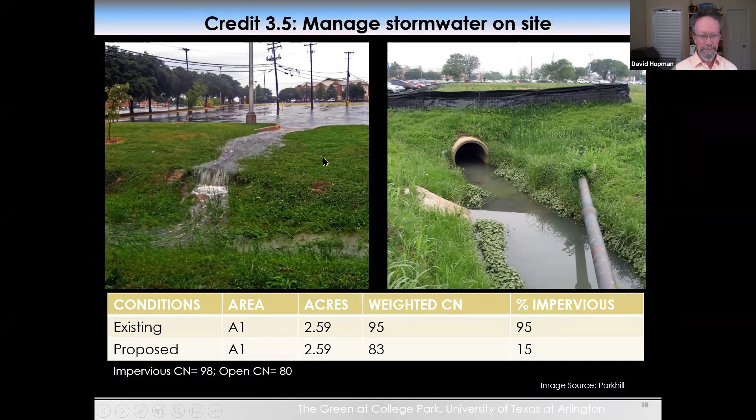And you can see the way it's set up right now, it actually works pretty well. Storm drain's actually over here, but these are actually new curb cuts that were designed by Schrickel Rollins. So the water sheet flows across a vegetated buffer, then across this material right here called filter pave, which I'm going to talk about in a minute, then back across some more vegetation, finally ends up in the rain garden.

This material is unbelievably permeable. It will drain about 30 inches an hour. And that's after it's already been in for a while.

So here it is, about 2012. This was installed, by the way, in April of 2011. And you can see that the vegetation was kind of under control. We'll talk about that a little bit in a minute. But it looked really nice. The planting design was done very well by Schrickel Rollins.

And then here it is, actually during a 4.5-inch rain event, after it had been raining really, really hard. You can see it's flooded over here. And the rain garden is starting to fill up, but this is about as full as it got.

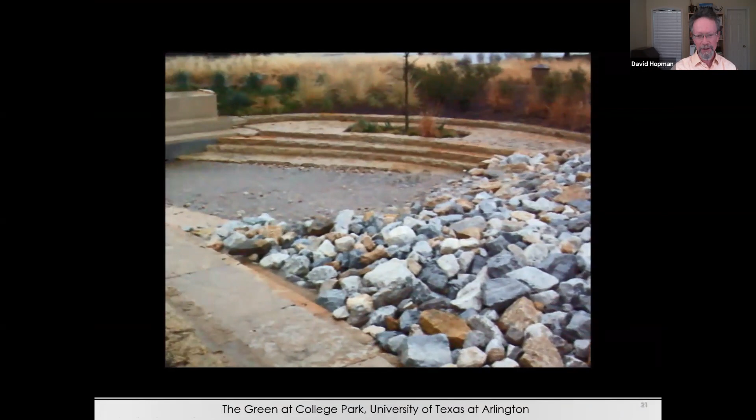So you see this is an old video, sort of pre-phones. I took it with my little point and shoot camera, but you can see that rain garden filled up with water. And there's the riprap, that's all covered with vegetation now. So it looks, this is fairly soon after construction. And then on the left there, you're going to see just a little trickle of water coming out. There's actually 2 six-inch pipes that also come out underneath that dam. And you can see that it's really working.

And this was actually while the College Park District was under construction, so there was a lot of silt in the water. It was still coming out fairly clean, so a lot of suspended solids had come out. There's a lot of robustness built into this, so that even though it's been here now for 10 years, it's still functioning great. It hasn't clogged up or anything.

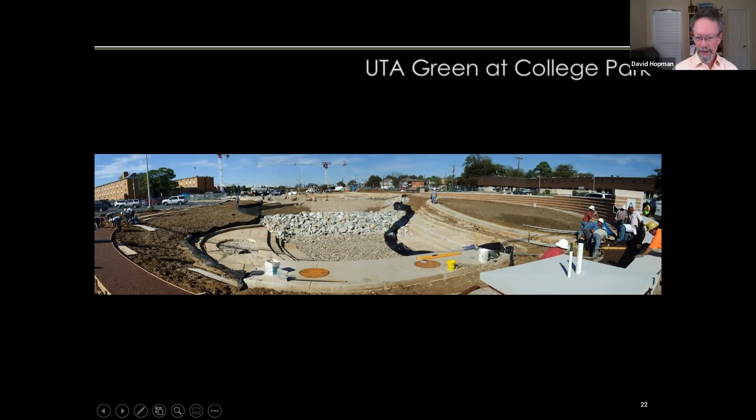So anyway, I'm going to move on because we're short on time. Here's what it looked like right as it was going in, and you can see they're actually installing filter pave over here and over here. Just a couple quick blow ups, and then I'll talk a little about filter pave.

Filter pave comes in grow bags. It's crushed glass, tumbled crushed glass, actually old beer bottles, which we thought was very appropriate for a college campus. It comes from Minnesota, which doesn't make any sense, right? Shipped all the way down from Minnesota. It's actually a BASF product, in case you don't know about it. It's a major national company, but it hasn't scaled as far as I know. Maybe you guys know something I don't, because I haven't looked into it the last couple of years. But until it scales in our area, there's not a market to make it here, but certainly it should be made here. The glass should be ground, and it's ridiculous to make it up there.

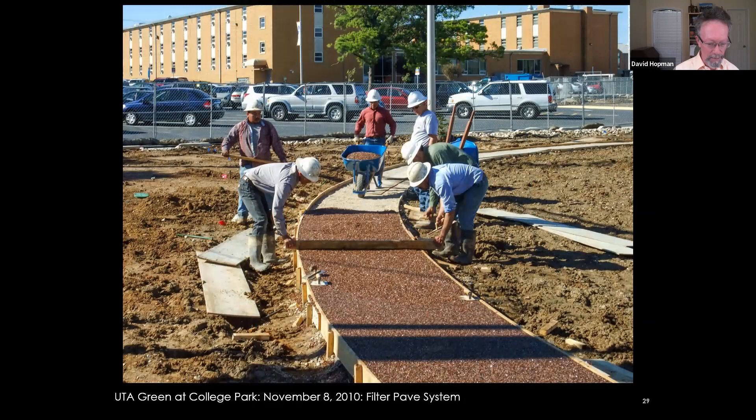So they basically take these grow bags and dump them into mixer trucks, and then add a little decomposed granite, some dye, and at the very last minute they put a polymer in there. It's basically epoxy to hold the glass together, and then it's spread just like you would spread concrete. First it's screeded out, but of course there's no rebar. So the carbon footprint is actually much, much lower than concrete, because so much of the carbon footprint of concrete is in the cement, but also in the rebar. And there you can see them floating it just like concrete. And of course none of these guys had ever worked on this before, so they were all standing around watching.

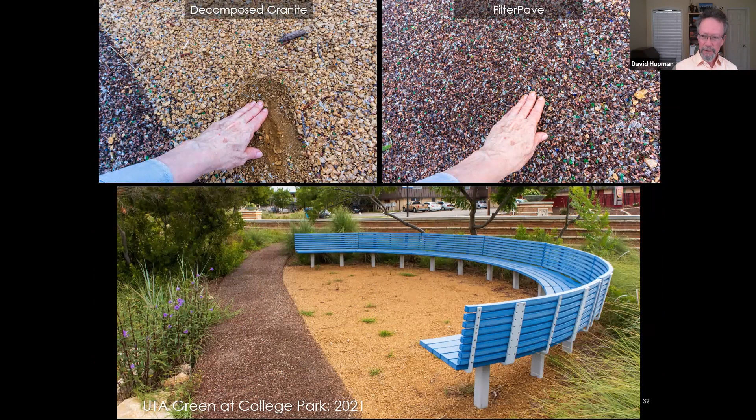The filter pave, remember, is now 10 years old. This picture was just taken a couple weeks ago. If you take your hand and rub it, you can feel the loose glass, but not enough to actually move. And it's amazingly permeable. I have a cylinder of it in my office. I can take it, put it under a tap full blast, and it just goes right through. So it's very, very permeable - about twice as permeable as permeable concrete.

I did want to, we've had a lot of discussion about plants, and plants are one of my passions. I've been looking into plants for bioretention structures and for urban areas in general for the last 5 years or so - it's been one of the major areas of my research. So I wanted to show that they did have a fairly sophisticated plant palette. They did a really nice job with the plants, I thought. And even though this looks kind of complicated when it first went in, looking at it visually, it looked really nice. Here you can see it filling in a little bit, still under control. And then I took this picture about 2 weeks ago.

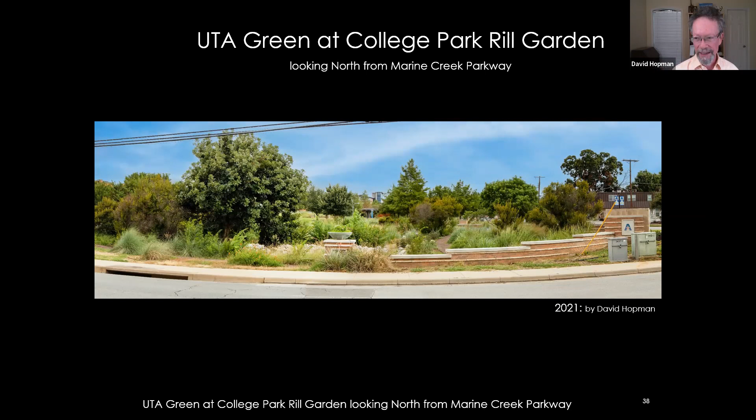Last year it was a big, massive stand of palms. This year, there's nothing. Of course, last year was crazy with the weather.

I think it was a nice project, designed well. It's perhaps not being maintained the way I would like it to be, but UTA is chronically under-resourced, like so many other institutions.

If you're interested in ideas about how to constitute plants for bioretention structures, just Google Hopman PPN - Professional Practice Network. It's from the ASLA. I've written maybe 15 or 20 articles for them. If you scroll all the way down to the first article and work your way up, the first 10 will take you through a journey on how to think about plant palettes, and it ends up in bioretention.

So it's kind of the undiscovered country when it comes to bioretention. We say we use native plants, we don't use native plants - we just have to reconceptualize the way we think about plants when they're in those kind of difficult conditions. I don't have time to get into it, but if you're interested, feel free to go over to the ASLA website.

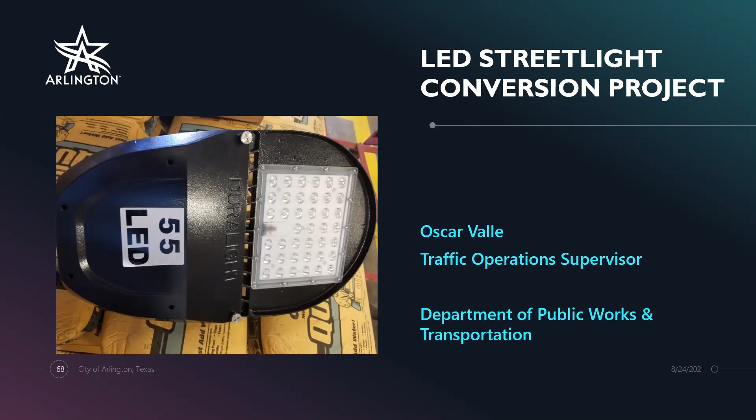Back in 2016 - if you all know, go ahead and go to the next slide - the city, we have about 23,000 streetlights within our city, and we own them all. Unlike many cities around us, we maintain all of them on the road - highways, arterial, residential, all the high mast. We own them all. So back in 2016, a third party came in and converted about over 12,700 of those 23,000 lights to LED, and I believe the city did not have the funds to do the rest of them.

So 2 years ago, in 2019, the Arlington Tomorrow Fund Foundation funded the project - it was a 4-year project. They funded the first phase, so we were able to purchase a few of the lights in the first phase. As of now, we have 5,200 streetlights left to do in our residential areas.

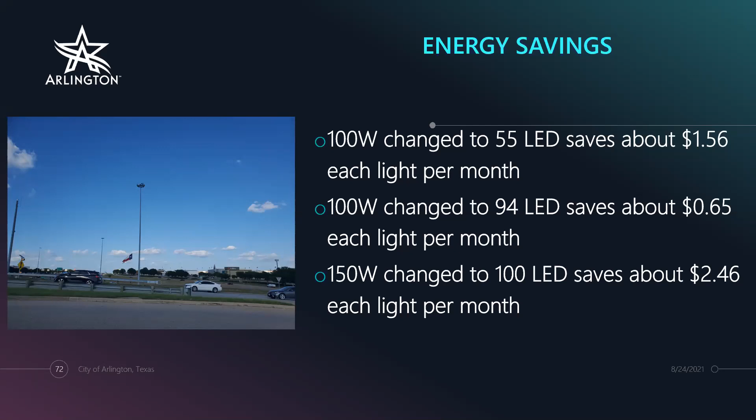A little bit about the LED itself: they have a typical lifespan of 10 years, with no bulbs involved, it's just one complete dial unit, you don't switch bulbs. On the other hand, the high pressure sodiums only lasted 5 years, if that long; we were replacing some even faster, within a year or two, going after the same spots repeatedly. The LED warranty we currently have is 10 years, and the companies we work with are very good at switching these out if something goes bad, but we see very little issues, and when we have had small issues, they're quickly and easily replaceable, no questions asked. Next slide.

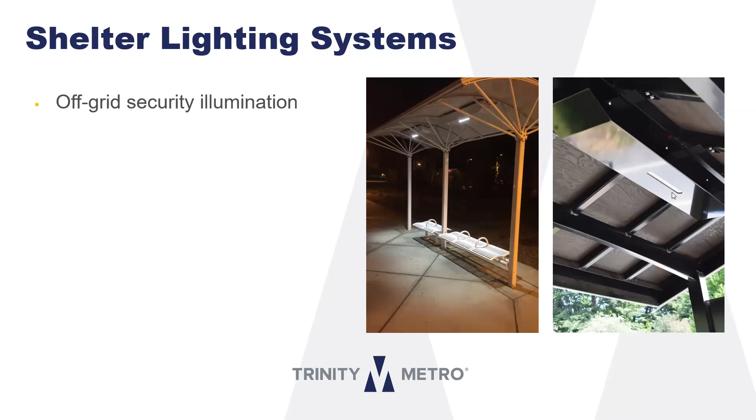So I will start with the shelter lighting system. It's an off-grid security illumination for every bus shelter. Sean, can you enter so that I can see all the text also?

So it's off-grid security illumination for every bus shelter. The lighting at the bus shelter is an 80 watt solar array, which means we have 2 panels on top of the shelter, on the roof. And the lighting produced is an 8 watt security luminaire - that's the technical term we use for the amount of light received by passengers waiting at the bus shelter. It has optional cellular monitoring and power for digital display, meaning that if there is any digital signage at the bus shelters, we can still power that signage using this solar panel. It's UL listed and made in USA.

Why solar? Because we have a lot of projects going, and it's always very difficult when we try to connect with utility lines. So the reason we go with solar lighting at the bus shelter is it's very fast and easy installation, which means low cost and minimal site disruption. As I mentioned, there is no utility to connect, so that means we can reduce the carbon footprint.

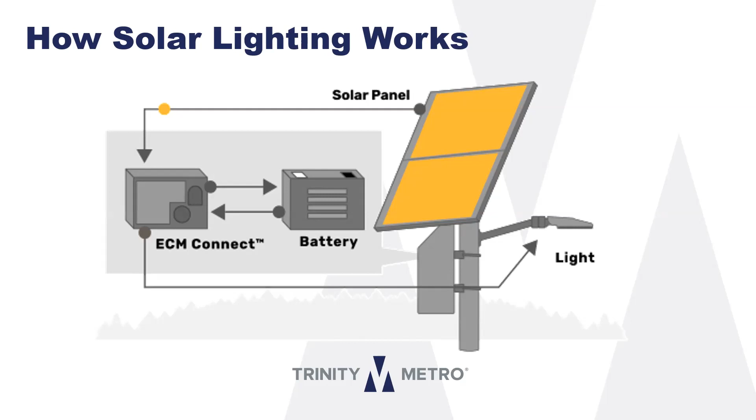So in the Trinity Metro solar lighting program, we started this in 2010, but between 2010 and 2016, we did not have enough funding for this project. So we used to do around five solar panels or five locations each year, meaning we did around 35 or 40 between 2010 and 2016.

But we started building a lot of shelters between 2017 and 2020, because a lot of people requested shelters so they could wait safely at the bus stop location. The number installed between 2017 and 2020 was almost 110. So we now have around 156 standard shelters.

The Green Peak shelter is the standard shelter, and we have solar lighting on 3 downtown shelters. Those are basically designed and constructed at site. Most of the shelters downtown are connected to utility, but 3 locations don't have utility connection because there were a lot of issues drawing the cables, and we had a lot of problems with that.